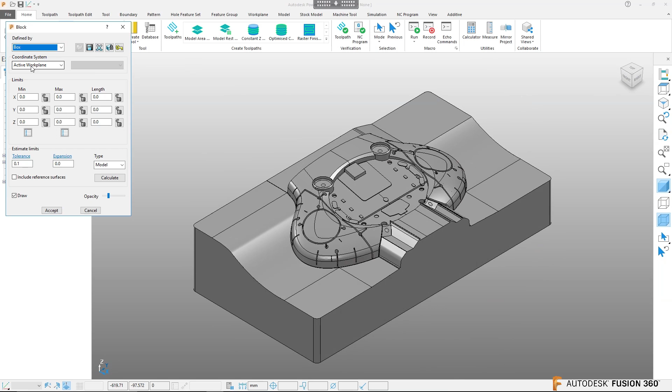Go down here, you can select your coordinate system. So I'm gonna select the global transform - that's kind of like the global one for the software here. And then I'm just gonna hit calculate, and you will see that automatically it creates that boundary box around the stock, just like we have in Fusion. We can add some tolerances and things like that.

So we now have defined our stock, so we're gonna accept that. That is the block up here. So the block defined on the home tab defines our stock.

Next, we're gonna set our G54 or work offset, or kind of like our work plane - and that's right next to it, so you don't have to go too far. When you have created a stock, you get an option down here to use that stock to select your work coordinates on, so we're going to select that. That's why we start out with the stock.

And when we do that, we get some different colored beach balls around on our stock here. We can select wherever we want. I normally like to select the back left corner - back because that's against my solid jaw, and left because that's normally where the tool changer is. So I'm going to click on that, and it turns kind of pink on the screen. I don't know who comes up with colors in CAM software, but come on, can we be a little manly? Pink? No, just kidding.

When we have clicked over here, we're actually going to start using this important left tree. Over here you will see there's a work plane, and if I hit the little plus sign next to it, there is that coordinate system we just set.

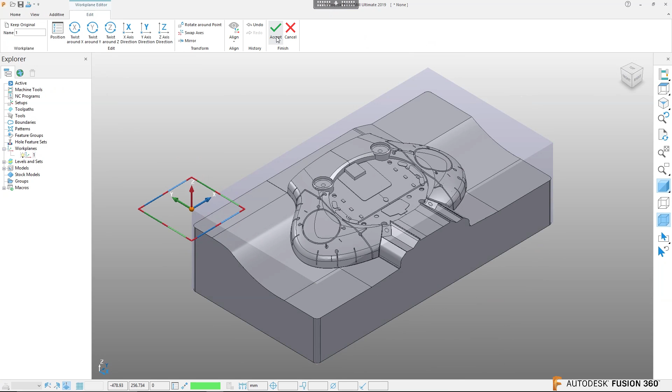So I can snap right here, and that now has moved that origin the way we want. I'm going to hit accept to that. And we have now just set our stock. You can see the boundary, the stock there with the block. And we have created our pickup point or work offset, G54, whatever you want to call it, that is sitting down here.

If you're working inside of Fusion 360 or Inventor HSM, you know that the next thing we normally do is apply our tool. So we normally apply a tool to this, and I have Fusion 360 sitting down in the corner here. That is not correct, but this is PowerMill. The next thing we do is normally create a tool. Now there is a tool database inside of PowerMill, but I want to show you how.

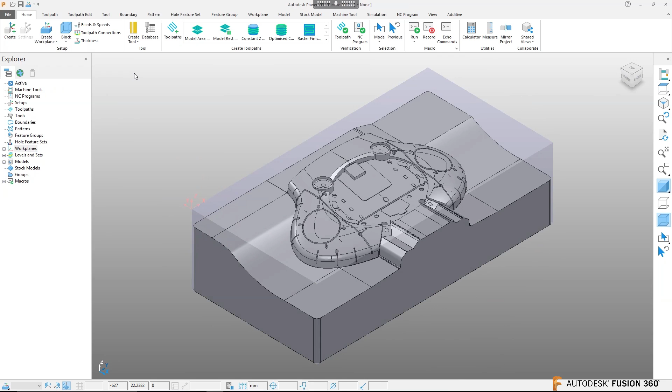In this one, I'm just going to create standard tools. I think tool libraries is a whole other topic. So you can go up here and you can create your tool, and here you can just create the tool that you have on the shop floor.

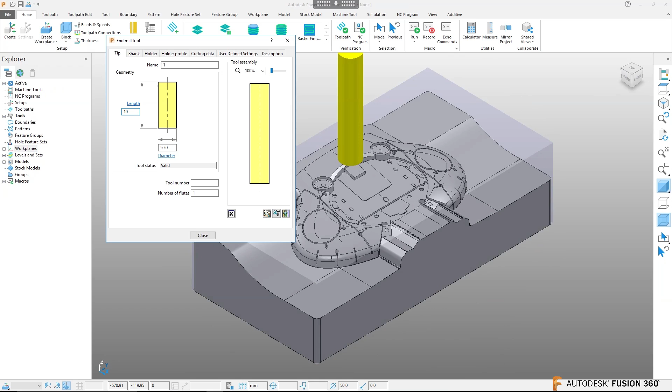So I'm going to create like a roughing shell mill or insert cutter, 50 millimeters in diameter. And I don't know how big your cutter is here. Let's make it 5 millimeters, 10 millimeters with your thickness of the cutter. You can also down here set the number of flutes. Let's give it 5 inserts.

And then I'm going to come back to these a little bit later. You can apply shank to it too. And if you do that, then you can go over here and click the plus sign, and we can add a little bit of shank, make it a little bit longer if we wanted to here. This is really not so important for what I'm trying to do here, so I'm just going to leave this cutter just like this and hit close.

So I clicked up here and said create a new cutter and applied the cutter that I want to kind of rough this part out with. When I did that, you will now see that cutter applied over here on the left. So everything's going to kind of appear over here, and you will actually see it has a number 1 next to it because I didn't name it.

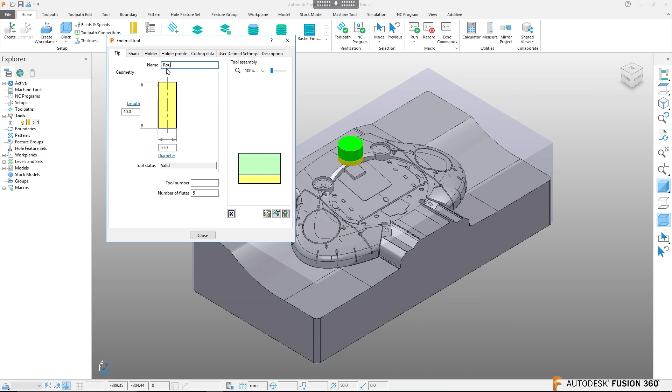You can always right click and click settings. That will bring you back into the menu, and I could give it a name. So roughing is probably - rough cutter, insert cutter is probably better. Insert cutter. So anything in here, you shouldn't have seen anything too much different than what we normally do when working inside of Fusion or anything else.

We created our stock, we set our work coordinate system, we have now created the first cutter. We are now ready to apply some toolpath.

All right, so this is where the fun starts with PowerMill. And for all you Fusion 360 CAM users, just check out some of the cool stuff in here. So I'm going to go over and say I'm going to create a new toolpath. And if you are familiar with PowerMill or you've heard of PowerMill before, you know that PowerMill is extremely powerful.

They have different 5-axis porting. It's used a lot for really complex 5-axis work. But this one here, I'm just going to do some 3-axis. I'm going to go in and add an area clearance here, and I am going to select a model area clearance. So we're going to use the model to kind of clear some of this material away. I'm going to click on that. You can see here, if I click on it, we get some nice different views in here. Add a model area clearance, hit OK.

And then we're going to be prompted here with the first dialog box to start applying your toolpath. I will always recommend start from the top and work your way down. So the first thing, we're going to give this a name for this toolpath. I'm going to call it roughing, for example. You will see over here to the left that we have the work plane, or what I call the work coordinate system, G54. We've already set that. We already set our block here.

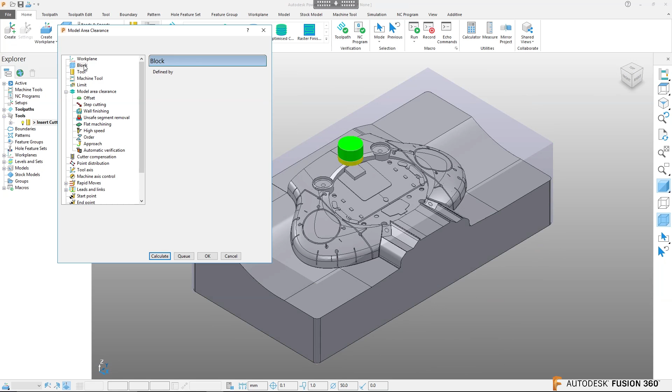Our tool, well, we had that insert cutter we just created sitting over here. I'm going to show you something cool about this in a second. So that is already selected, so we can move down to the model area clearance. There is a lot of different things you can do inside of PowerMill.

You will find a lot more control than, for example, we're used to inside of Fusion. But that's kind of, great power, great responsibility. In here, I'm going to go over to the right section.

And I'm going to change the style in here, and you will see we get some view here. You will see down here there's something called vortex. That is very much like adaptive clearing inside of Inventor HSM and Fusion 360, just so you're aware of that.

If I select offset model, it will actually collapse from the outside and work its way in. So that's almost like cavity or core, sorry, in Fusion. Going from the outside in, we're going to leave a 1 millimeter material because this is a roughing operation.

You can control a step over. Now this was a 50 millimeter cutter. Change that to 20 millimeter step over. And then we can do a step down here of maybe 3 millimeters.

Now, if you are brand new to PowerMill, I would recommend that you kind of step through the different sections in here. So here you have some advanced offset setting, don't really need to worry about that. If you have any steep walls, you can start working with that. Don't need that. Wall finishing, nope.

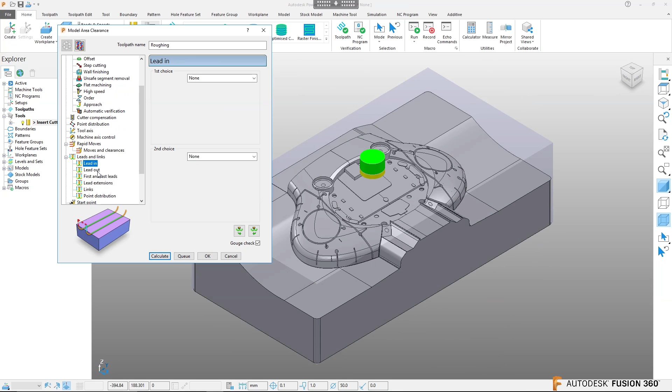Moving down here, a couple of other things. There's some rapid moves you can control, calculate those automatically. Lead in, lead out might be important to talk about too. So a lead in for roughing, we might want to use something like a ramp in here.

And the last thing I'm going to briefly talk about is feeds and speeds. We've talked about this before on the live streams when we're talking Fusion 360. You need to start out with the cutter manufacturer's recommended feeds and speeds.

Find a good cutter manufacturer, somebody you can call up and ask some questions. That's what I recommend. There's a lot of great online calculators, but I still go back to the tool catalog for the tool you're using and use those feeds and speeds.

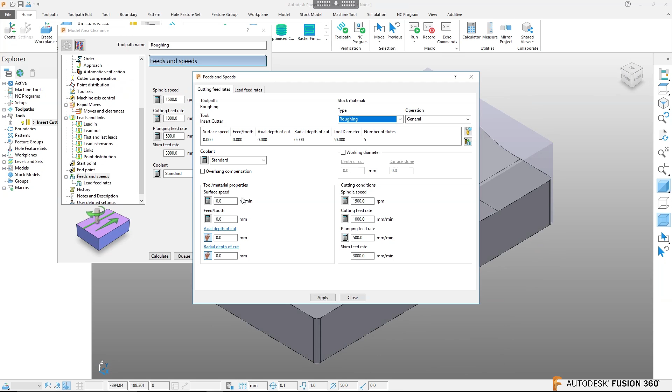Just so you know, if you click up on this little button, you will get kind of like an in-depth section in here where you can do surface speed, feed per tooth, and things like that. This is all we're going to set for our first roughing toolpath, and I'm going to hit calculate here, and it's just going to take a few seconds to apply this toolpath.

And then I'm going to show you something that if you're a Fusion user, man, you're going to like this. This is going to be on my idea station for the CAM team to get inside of Fusion.

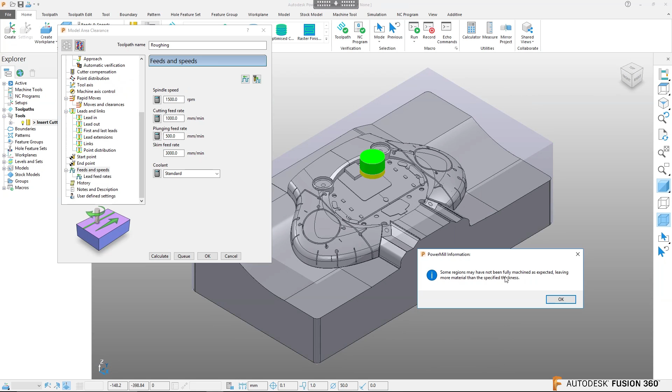So we get a little warning here, just telling us that there are certain areas that were not fully machined, which is fine because we're going to go in with some extra toolpaths. So I'll say okay to that, and close this dialog box, and we have our first toolpath here.

Now, here comes the first thing that just makes me become a fan of PowerMill. Notice what happened here, the cutters are machining down the side, right? And that's something we normally don't want.

We understand why it did that because it just analyzed the model, but we're probably holding this part in a vise or something, and just because somebody applied some chamfers to it, it's going to machine that down.

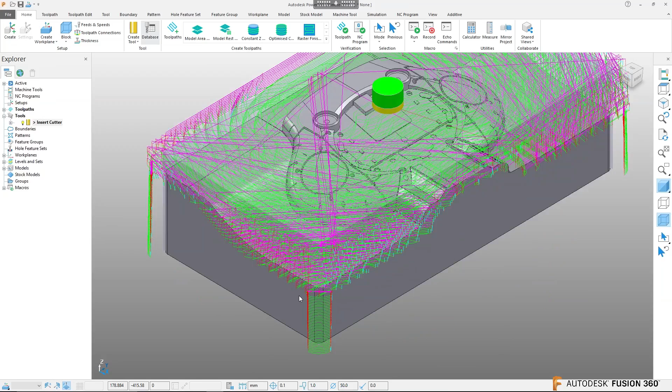Check this out. If we go over and click on Toolpath Edit, here comes the magic. I'm just going to left window around these toolpaths and click Delete. Boom, it just healed up that section.

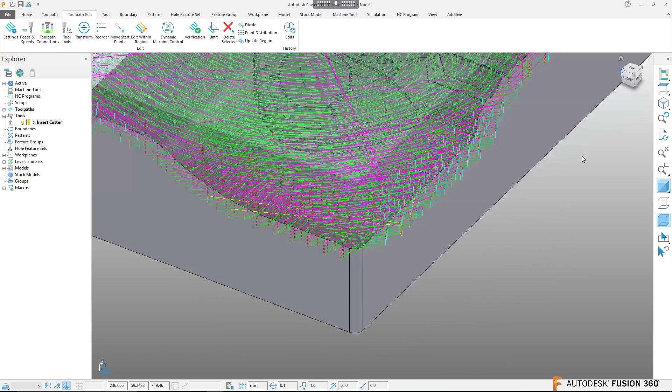What? Wait a minute. Let me just go over to another corner, spin the model around here. This is absolutely awesome. I'm just going to window the section of the toolpath that I don't want and hit delete, and it automatically heals those toolpaths right up. Woohoo!

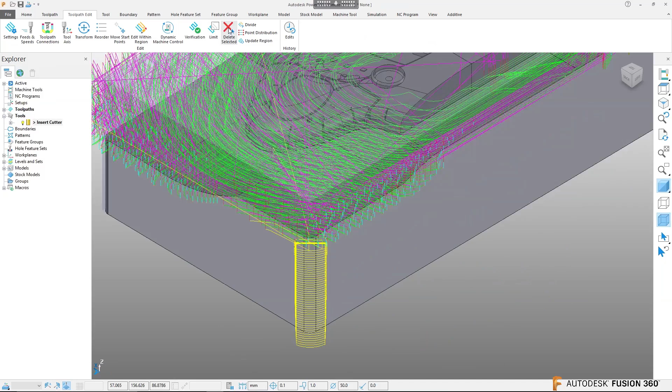This is worth the money in gold right here. We can literally just clean these up. Now I'm going to show you another way you can do this in a second.

Thanks to my friend Rob Walker, but just check this out. I like that already. So that's one thing you can do in here. You have some great options to adjust these toolpaths. Now I'm going to move on here a little bit further.

Now, one of the things that you will always hear me talk about is simulation. Go in and verify your toolpath. You can turn that on in here, it's called ViewMill. Just turn this on here for a second.

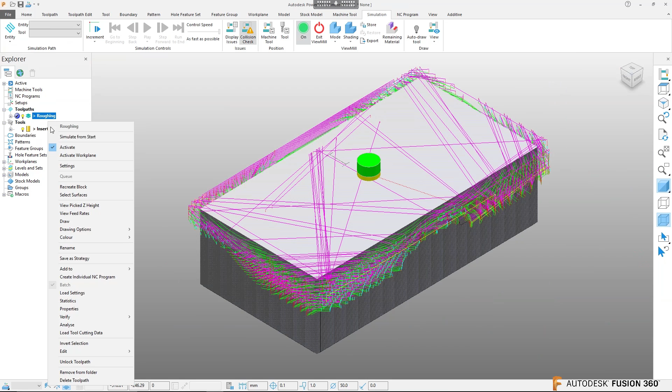This to me is one of the most important things when it comes to CAM. You cannot not do this. You need to go in, and this is like looking into the future. So I'm going to go over here to my toolpath, right click and say simulate from start. And you need to, of course, take the time to watch your toolpath machining. There's no way you can cheat away from that.

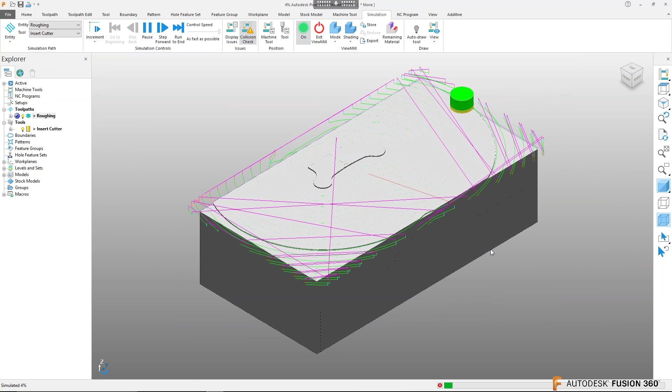And I have spent hours watching simulation. There's a lot of different ways you can do things in here. You just need to know that the simulation is in here, just like we have it inside of Fusion and other CAM software. You need to take the time to do that.

I'm not gonna get too far in here, you can do all kinds of stuff. Actually, one of the things you can do is you can change how it looks at it, so if you're looking at it as the tool or the table and things. But short on time, you gotta go in and simulate it, make sure it looks good.

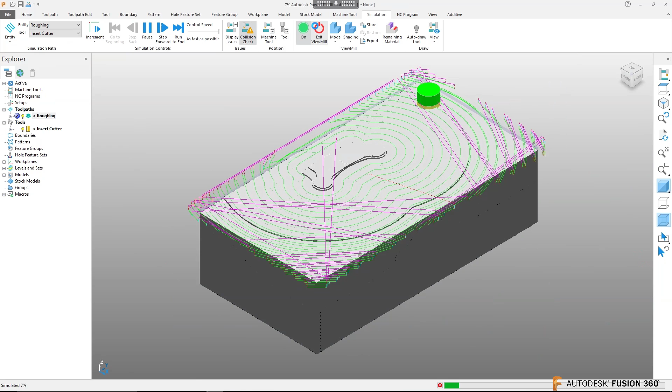The other thing that is pretty dang cool about PowerMill that I like is that you can create, yes, we're gonna hold the stock simulation. Get out of this here, okay?

Another thing you can do in here is you can create what is called stock models. So right now we've applied our toolpath here, and you can kind of see that sitting over here on the left. You can turn it on or off by clicking the little light bulb. You can create a stock model.

And what this will do is the software can use this to reference future toolpath from. So if I right click on it, it's probably the easiest way to do it, say create a stock model. And you can create multiple of these. So I'm just going to call this stock model, and I like to put a number on it, number 1, and I'm just going to accept this.

So now I've got this stock model created, but it's really just like the stock block we created in the beginning. But what we can do is start adding toolpath to this. So I'm going to go up and take our roughing toolpath, right click on it, and I'm going to add it to the stock model. Now when I do that, you will see that that gets added down here, and then we get a little calculator next to it. I'm just going to right click, and I'm going to go ahead and say calculate.

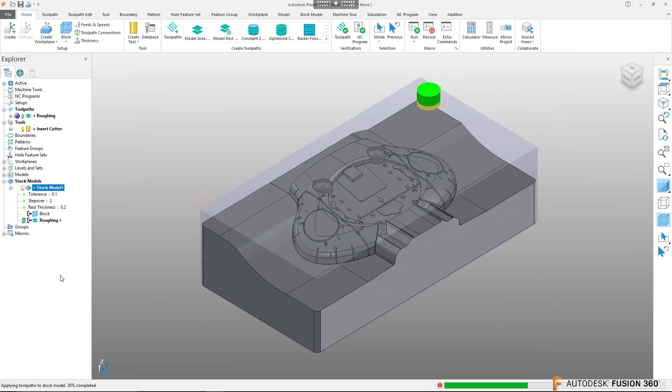And you will see, again, the colors in the CAM software.

Why all these girly colors? I'm just kidding, it doesn't matter.

You can see that our model changed. That's going to bring me over to this view on the right. I talked a little bit about that in the beginning. So the first one down here at the bottom is your block, or your stock.

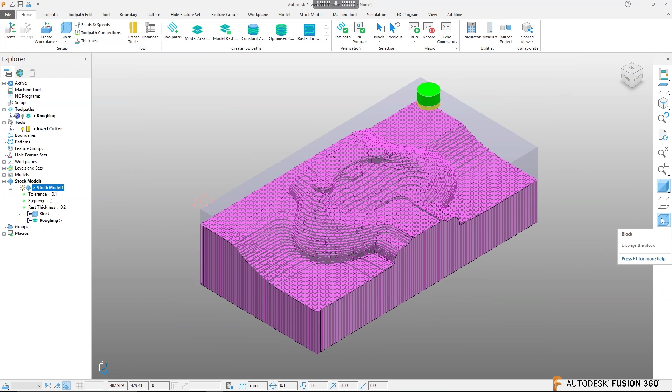You can turn that off, see that flashing on the screen here? Turn that off. The other one you can turn off and on is the model itself.

It's kind of hard to see anything right now, but I'm going to turn it off for a second, because with this stock model we can actually turn it on to shade and let it update.

Then we see that finished result from our simulation. So this is what our roughing operation had left us. Another neat thing is you can right click on it and say show rest material, and now it'll show us what is missing on the model. That's kind of cool too.

Give it one second here. See, so now it shows us all the things that are left over. I really like that. This stock model is really powerful.

I'm going to right click on it again and switch it back to show all material, so you can see it right here. We can reference that for our next toolpath. So I'm going to turn our block back on, and turn our model on underneath it, and then we can start our next toolpath.

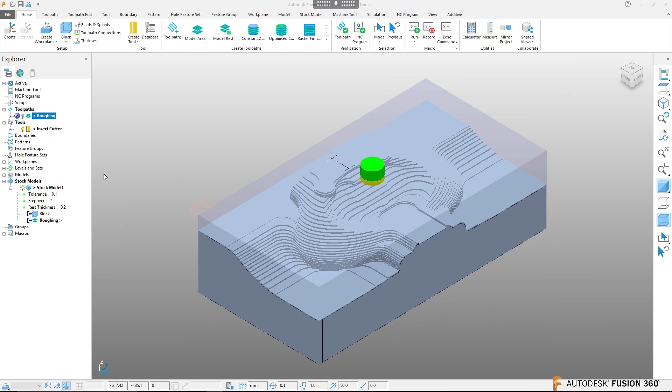Now, so we could do what we did before, we can go up here and click toolpath. But one of the things we can do is right click and go in and edit the existing toolpath, the existing roughing toolpath. That's how you do that.

It's just going to open up here. And right now you'll see we can't change anything in the area. If we wanted to edit it, we'd click on the little recycling button up here, which lets us edit it. But the next one lets us clone it.

So this is kind of creating a derived operation. If you've ever watched the Fusion 360 CAM videos, you know what a derived operation is. Inside of PowerMill, this is called clone. So we're going to make a copy of this toolpath.

Click on that. It gives us a warning because we had made manual edits to that first toolpath, but we're okay with that. And now we're actually in our second one, and you can see that here's the roughing, and here's the second one. So I'm going to call this one rest machining.

Okay, and we'll make that capital too. Come on. The work plane and the block are still the same.

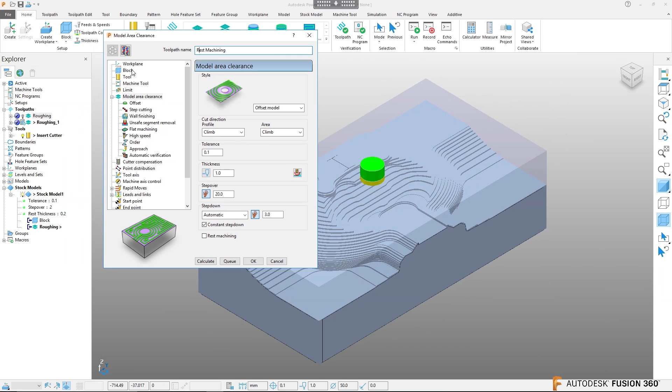Now for the tool, we had that insert cutter we created before, right? But you can actually also create your tools right in here. So we can go in and say, well, now I want a 20 millimeter cutter for my rest machining, with a 25 millimeter flute length. I'll call this one 20 millimeter. In the first one, I created the tool out in the menu, but you can actually create them right inside of the operation.

So let's make this a 4 flute. If I want to get out to that editor you saw before, I just click on the pencil. So I think this somewhat makes sense. Now we're back out in that editor we had before. You saw before how I clicked on that little plus sign to add a bit of shank. We can do the same thing here.

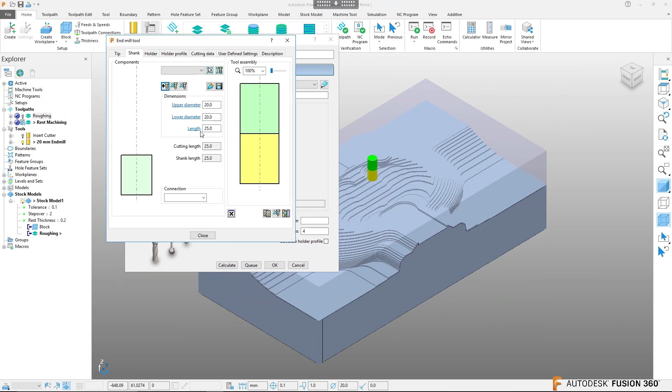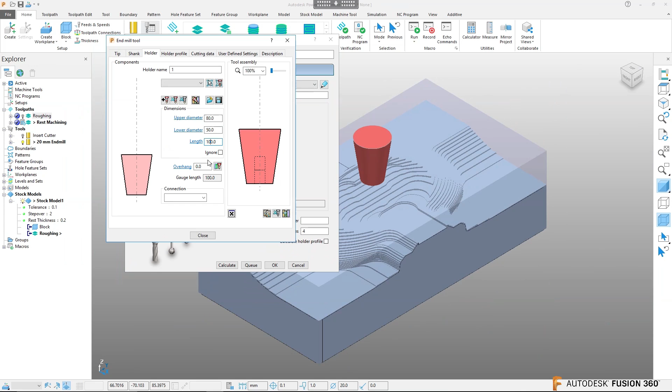We can also go to the next one and add a holder if we want to. So let's make a holder that is 80 by 50 by 100. I think if you work with other CAM systems, a lot of this stuff should be pretty self-explanatory. Give that a little bit of sitting right there. That should be pretty straightforward if you're coming from other software.

Now you saw before when I did the roughing operation how I used the delete function. I almost want to do it on purpose again, but just so you know, you can of course also control a boundary just like we're doing inside of Fusion 360 or other CAD software.

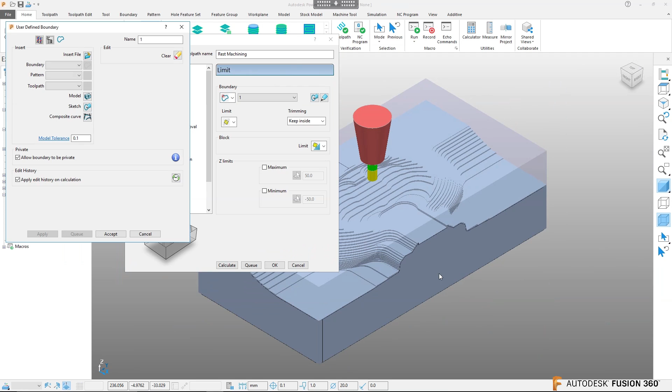Here I can go in and select a user defined boundary, and if you're holding your cursor over, you get a little menu that shows up. So I'm going to click on this, and I'm literally just going to roll over and select right on my model here, select the section here, and on the model section, and you can see the yellow now that it knows the boundary. So accept that.

So that was how we set the limits, so now we don't machine down the sides. Model appearance is very much like before, but now you notice we have the rest machining tab, right? That's kind of what we're doing now.

We're looking at the previous operation, and now we can change our step over to maybe 10, and let's go 1 millimeter step down, and then we can go into this rest machining section. Inside of Fusion, we many times use the toolpath where we're looking at the previous tool, but now we can actually select that stock model we just created. So now we're using that stock model from the previous operation to go on.

A couple of settings you should know about: detect material thicker than. You can set a tolerance here, so if there's like a small feature, you don't rest machine that. You can also control how much further than the rest machining area you want the cutter to go, so you make sure it kind of goes past a little bit. Make this 4. That's fine.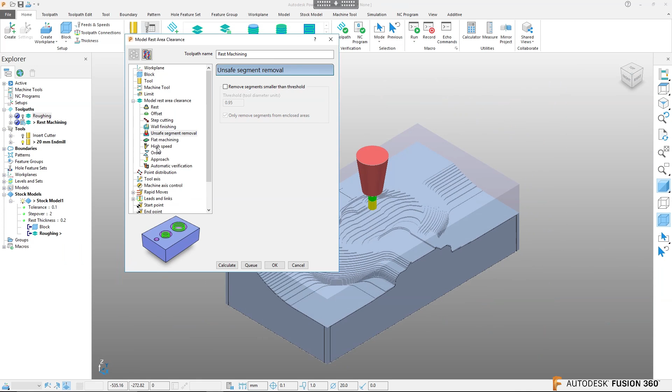Of course, for some of the remaining feeds and speeds, you gotta go in and change those to whatever your cutter is. But we're just gonna hit calculate here and let this calculate. So I'm just gonna take a sip of water.

So this is gonna start calculating here. This is gonna take a little bit longer than normal. Oof, I don't have the air conditioner on in my office. It's like 88 degrees in here, so it's a little warm.

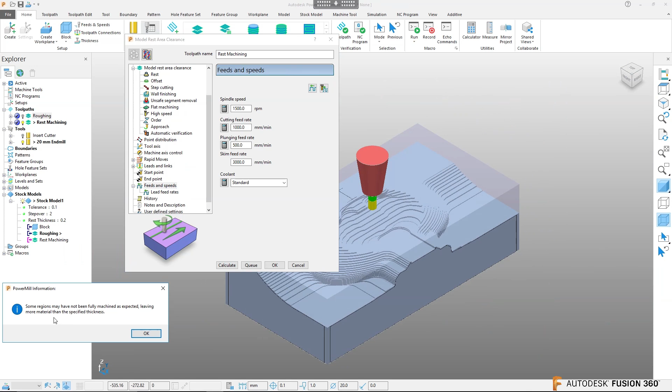It finished calculating. You will see that we get the same warning we got before about the regions - there's certain regions that don't get touched. That's fine. You will see that now the toolpath looks a little different, right? Because now it's just going in rest machining these different areas. And notice how it's not machining all the way down the edges anymore because we have applied that.

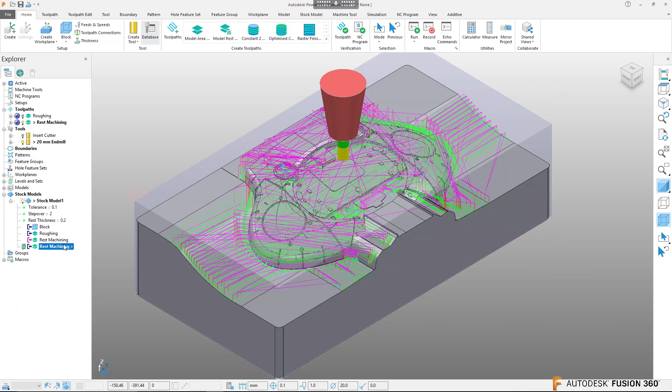So with that done, we can go into that rest machining and add that to our stock model and calculate that, and I'm going to show you just in a second. We're going to apply one more toolpath, the finishing or semi-finishing toolpath, and then I'm going to show you before we post the code out why this whole stock model is really, really cool. So let's add the last toolpath in here, a finishing toolpath.

So I'm going to go up to toolpath, just like we did before. And instead of an area clearance, I'm going to select a finishing toolpath here. Let's scroll down to the bottom and select what is called a steep and shallow finishing operation.

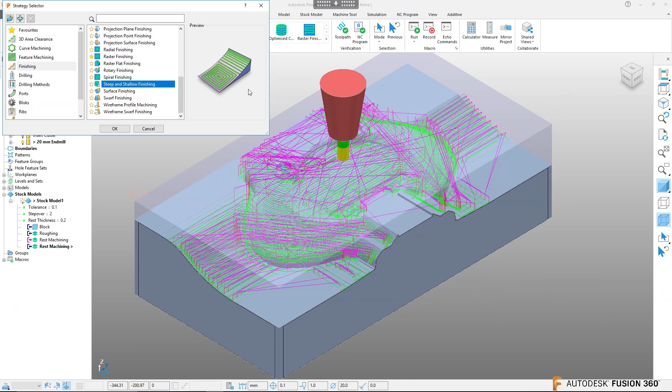I made a video a while back about 3D machining because I think for some people it's hard to figure out what kind of toolpath you should be using, since there's many when you get into 3D machining. In that video I talked about how in a lot of CAM packages you're combining types of toolpath, and that's actually what this one does. I talked about how we have a parallel cut, that's what you see up there, and kind of like a collapsing cut.

So that's what I'm going to select here. Hit OK to that, you see our stock model kind of updated right there. So now our rest machining is made a little bit finer. We're going to call this one... this is probably a semi-finish, but it's going to be the last one we're adding in here.

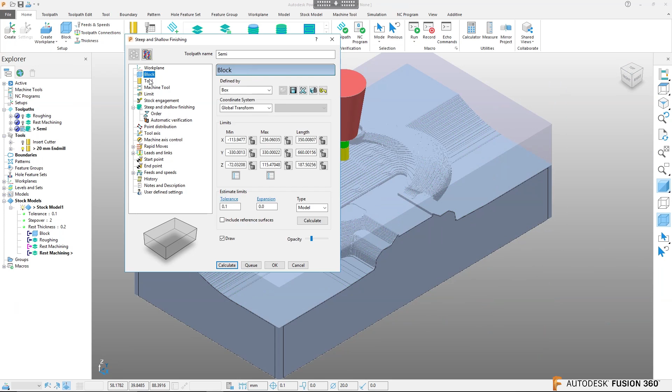Again, work plane and block we already set. Tool, let's shift this over and change to a ball end mill. Let's make that a 16 millimeter ball end mill. I'm not going to add any shank to it right here, just move on because we're coming up on the half an hour. It probably has some more than 4 flute on it, but whatever.

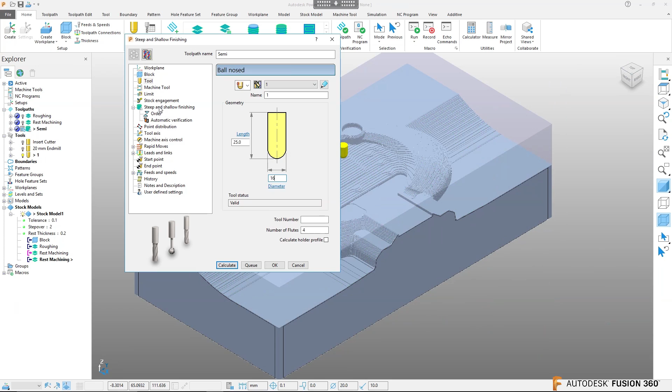Let's go to the steep and shallow section right down here. One of the things I like in here is you can calculate your step over with the cusp. That's kind of like the step - not the step over, but more like the cusp, the waves created when you're 3D machining. So we can change that to 1, and I'm going to make a step over of 2 millimeters in here.

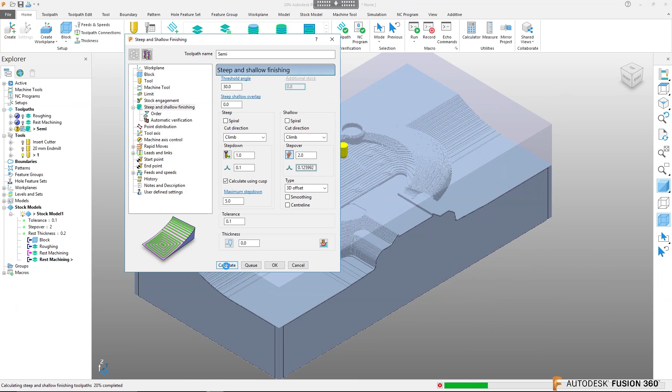You will also see, again, a lot of options in here. You will see that we now have 0 thickness in here. I'm actually just going to click calculate on this toolpath, and let's just let that wrap up as we're hitting the half an hour.

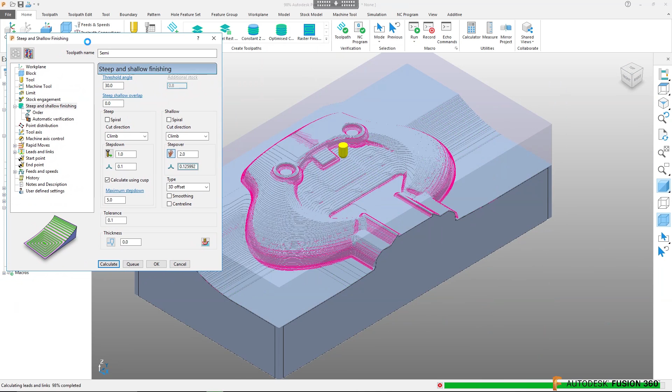Notice how it starts applying the toolpath right here, you can see them develop in here. It's always nice to kind of see them grow, whatever you want to call it. But if there's anything I want you to take away with this before we start posting out code, it's that if you're coming from another CAM package - like coming from Fusion 360, whatever it is - these are the same steps we're kind of using.

Now let me just add this to our stock. Add that to our stock model and calculate that. So it's all about the basic steps and getting the toolpath in.

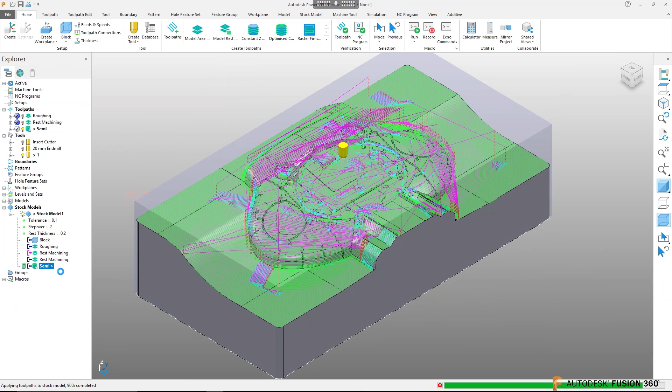And yes, if you're going in here to use this for 5-axis, we can do live streams on 5-axis. I definitely at one point want to come back in and do something on additive possibly. But I just want to make sure you kind of see this and get an idea about this.

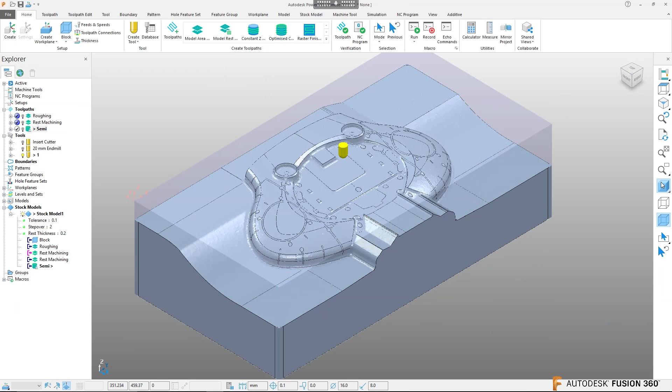Now we can turn our toolpath off up here on the light bulb, right? And if I turn off the model and turn off the stock, now you will really see the stock model kind of shine. Notice how we now get a really good view in here in PowerMill of what is machined and not machined. That gives you kind of like a confidence booster that this is what you're going to get when you are out there.

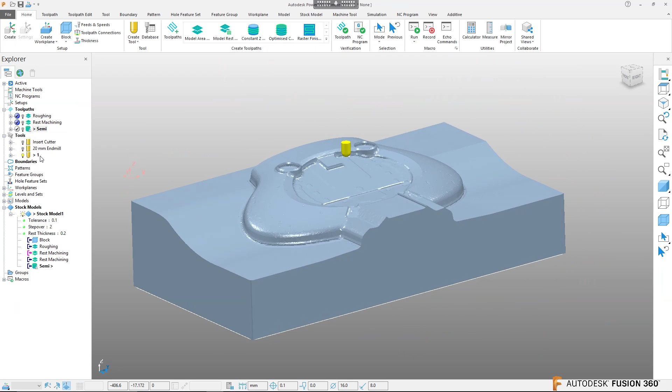I showed in the beginning here when it comes to the roughing machining how we had the toolpath edit where we could just delete out of here. Also be aware that if you click on the toolpath connection for this semi, you can go in here and change things like the lead in, lead out. So we start out with a ramp, and we can change that to a surface normal arc here. So you have control over lead in, lead out - you can click on these here, and we'll bring that from the lead in to the lead out. Linking tabs - links mean between toolpath. All these things in here.

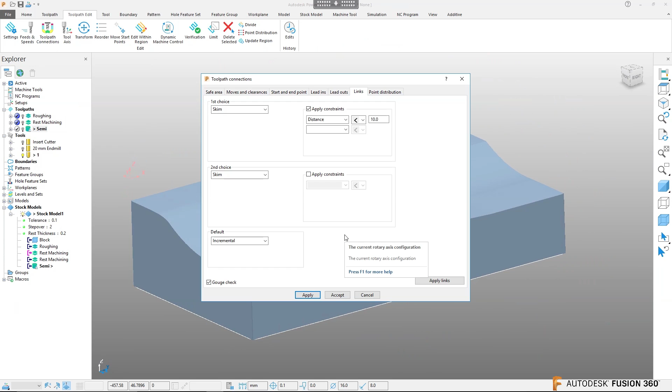I'm going to wrap this up here. We'll actually post some code out because I think that is important.

But this here, hopefully, if nothing else, if you are brand new to PowerMill, this here - setting up the stock, setting up the work coordinate system, your offset up in the corner, applying these toolpaths, following it step by step - hopefully this was useful.

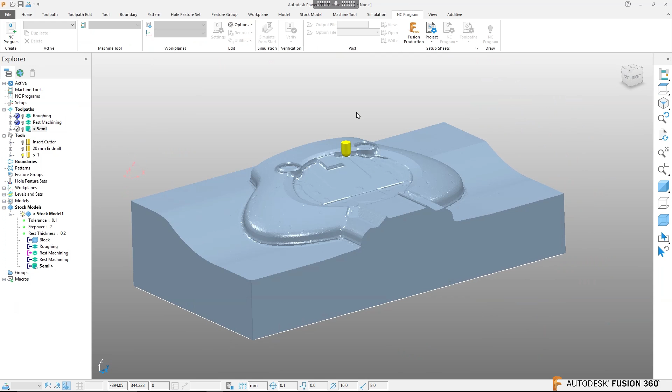You let me know. All right, let's fire up some code, because code is really the only thing that matters. All the other stuff is cute, but NC code is what matters. So let's click on NC Program.

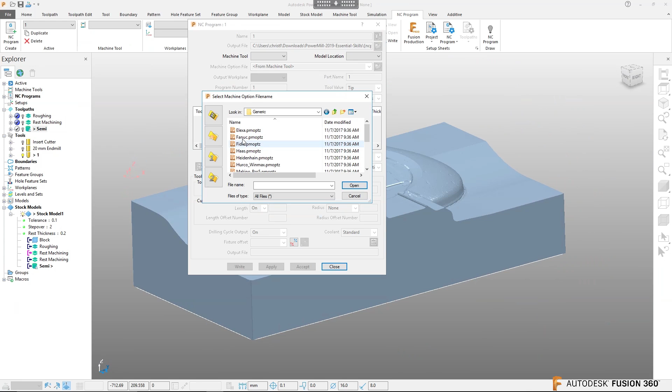Open that one up. And to bring your operations in - this is actually kind of cool - I'm just gonna select the top roughing over here and the semi. Select all three operations and drag them right. Should be able to drag them right over.

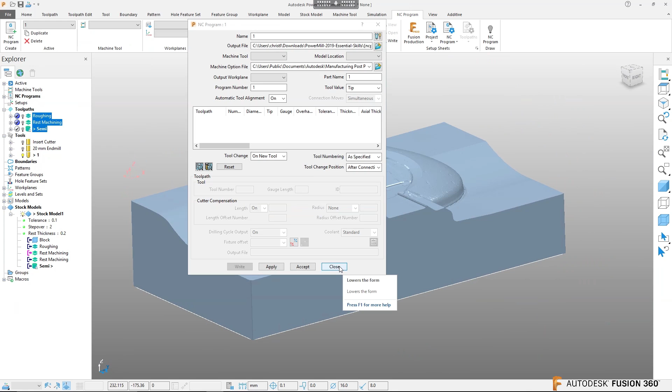I thought I could drag them right over to the setup. Maybe not. Maybe I'm still inactive. This is the best thing when my... all right, let me just close out of this. Oh, why can't I drag this now? Oh, it's still calculating. Was that it? It was maybe still calculating.

Open that up there. Oh, this is the best thing about doing these live. Haha! There we go, drag it over. Right click - and can I get back in? So now they're over here.

All right, go into settings. Now they're in here. So one of the things I want to show you is you can actually set your tool numbers in here too - set this to 2, and set the last one to tool number 3.

And when you're done with this, we should have the post up here. We click write, and then it's gonna write these three toolpaths out to our code here.

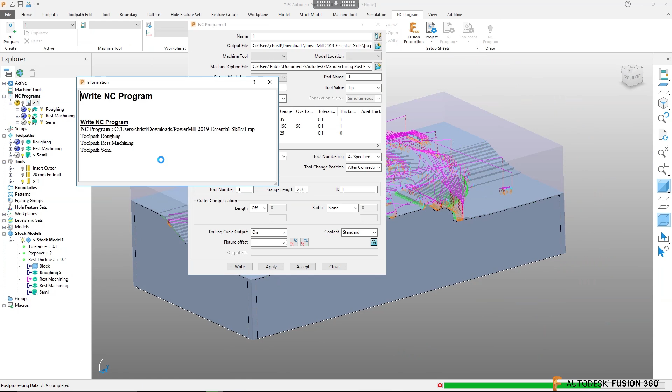Oh, I don't even know where I put it now. Might have to repost this out again. Let's click here - let's post this out to our desktop. That's probably better. Give it a name. I always call my program 7501, going back to my days. Let's write this out.

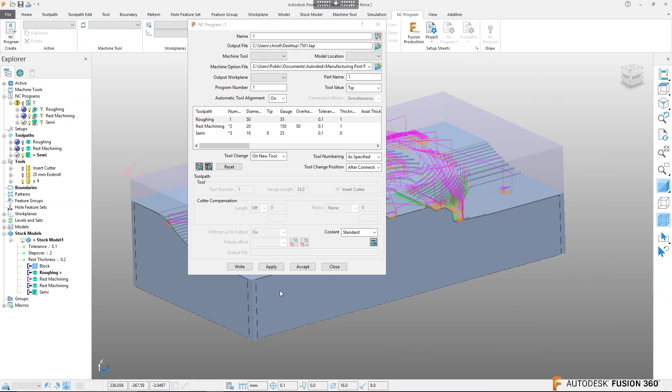Okay, this is what matters - all the other stuff is just pretty. Close this out, let's go down to my desktop here. Whoops - come on, Windows 10. And it comes out as a .tap. I'm actually going to rename this - right click, rename it to a text file so we can open it, since I don't have an editor on this one. So .txt, hit enter - yep, you can change it - and let's just open this up in Notepad.

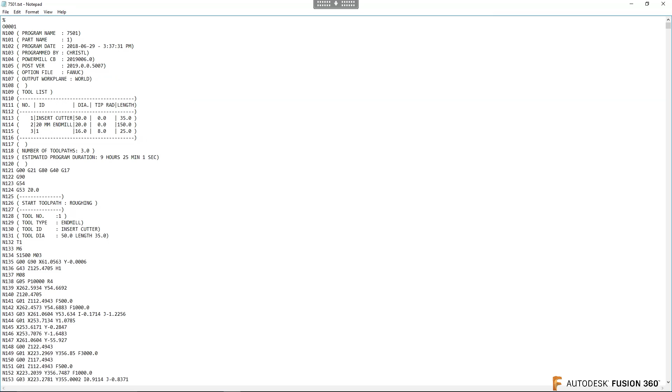And here you will see the code, the 7501 that I just called it, programmed by me. Well, this is all that matters, isn't it? The code for this part here. I hope this was useful.

It was a little bit different. You let me know if this is something - I think I'm gonna try this once in a while. Definitely Fusion 360, that's what we do here, but I think it's interesting to see another CAM product.